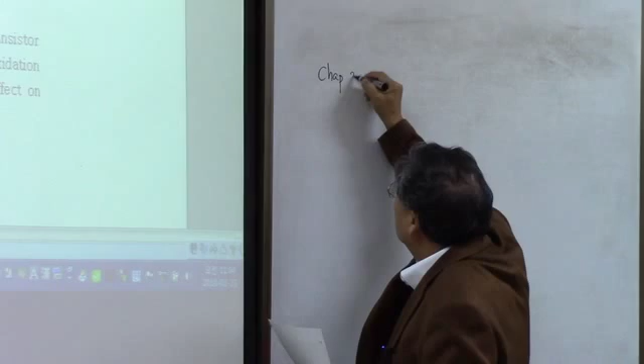Oxidation, which is chapter 3. Okay.

Well, oxidation, we are particularly going to discuss about the silicon oxide, which is this thermal oxide, we call it thermal oxide. And this happens at elevated temperature, it has to be more than 900 degrees centigrade, and typically is done at 1000 degrees centigrade and 1100 degrees centigrade in between.

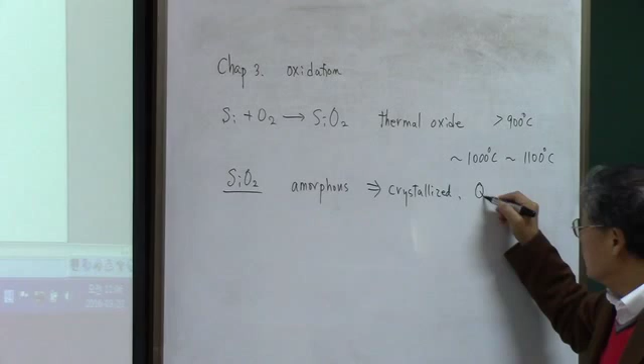Okay, so in the note, it has a summary of the characteristics of silicon oxide. This silicon oxide is amazing material. This is basically amorphous, and we can crystallize this thing, and if it is crystallized, it is going to be called quartz. Expensive material.

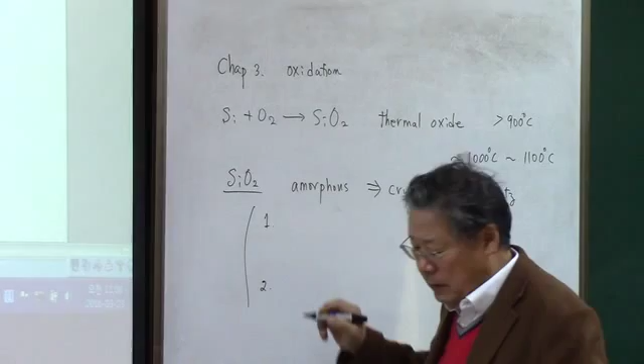Well, there are many beautiful characteristics of silicon oxide, and that has been summarized in the note. But I want to emphasize two things among those characteristics. One is the excellent dielectric properties it has. And the other thing is the volume change after oxidation.

Well, firstly, about the excellent dielectric properties, let me give you the example of three different kinds of oxide. The first, the common thing is the iron oxide, Fe2O3. We can have oxidation continuously so that we can have a thick oxide, okay? But it is not dense enough. We just scrub off. We can scrub off the oxide, iron oxide, okay?

So it is not dense, but it has a continuous oxidation. It's possible. Continuous oxidation is possible.

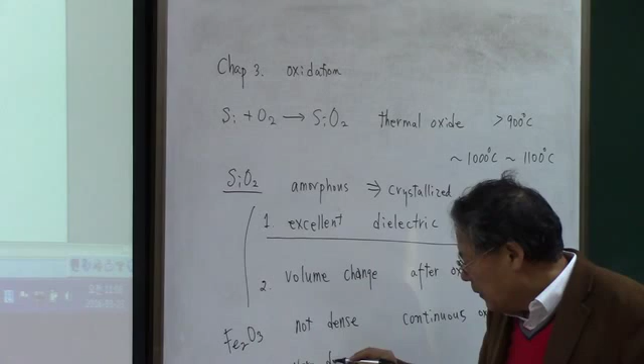Another form is the aluminum oxide. It is very dense, and it has a passive layer, so that only 50 angstrom of oxide is formed, and then no more oxidation can happen. Oxidation cannot be continued after the 50 angstrom of aluminum oxide.

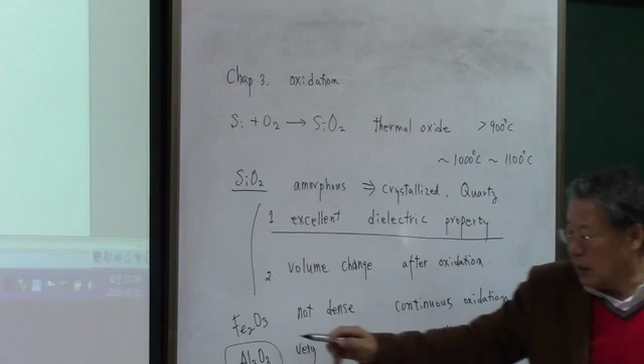So that's why this aluminum oxide can be used as a can for beverages. Okay, it's safe. You cannot use iron steel for the beverage cans. If you do that, then you are going to have iron oxide continuously, and that iron oxide can be scrubbed off from the surface after the oxidation.

But silicon oxide is in between these things, so that it can be used in VLSI, semiconductor fabrication. It is not very dense, but dense enough to have good dielectric properties. And then we can grow 1 or 2 microns of oxide.

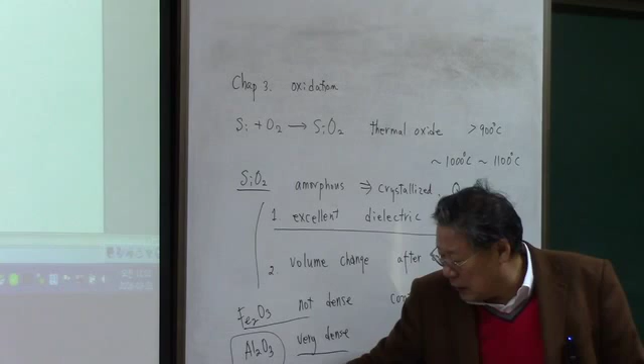The oxidation rate is not that fast, but we can grow the silicon oxide on top of the silicon surface up to 1 to 2 microns, and that is thick enough to be used for VLSI. So this is the gift from God, we should say.

Okay. If this silicon oxide is to have the properties of iron oxide, then it cannot be used for semiconductor fabrication, transistor fabrication, whatever. And if it has alumina characteristics, also we cannot use this silicon oxide for transistor fabrication. So it's very fortunate to have silicon oxide with those properties, and more importantly, it is not that difficult to form a silicon oxide on top of the silicon.

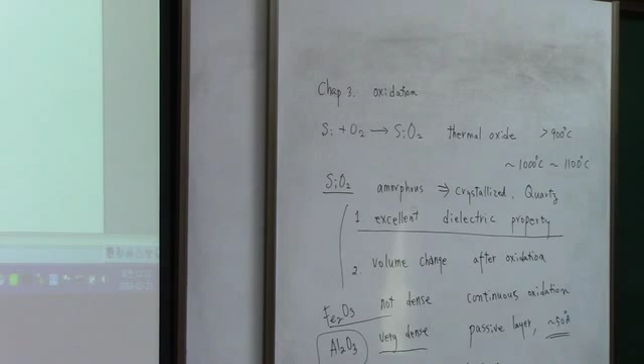All we have to do is just to put the silicon in the furnace in air at elevated temperature like 1000 degrees centigrade or 1100 degrees centigrade. That's all that we have to do.

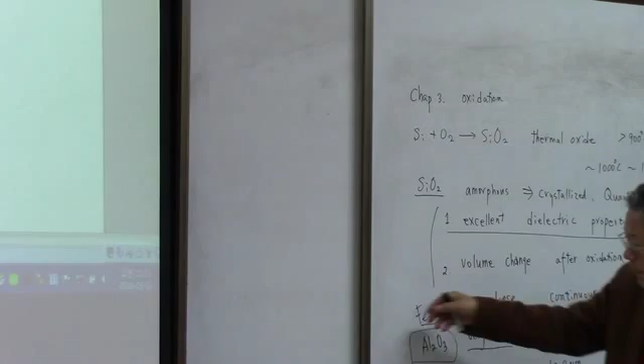Okay, and the second characteristic of silicon oxide, which is volume change after oxidation, that is the beautiful thing that turned out to be very important in the fabrication of VLSI. Now, when you say the volume change,

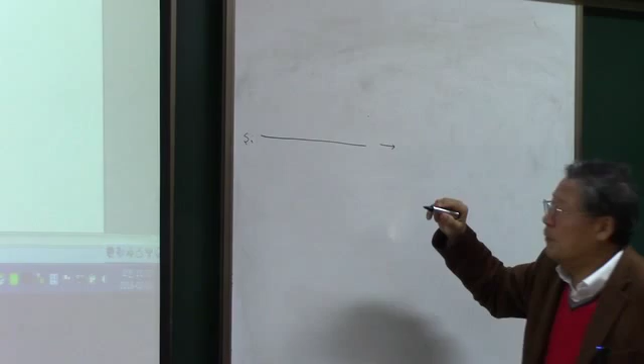it means that if you have a silicon surface like this, and after the oxidation, you're going to form some oxide, and some goes down to the silicon surface, and some goes out to the silicon surface, so that this whole thing is the silicon oxide, and the distance from D1 is equal to D2, so that the volume is doubled, I should say. Okay? That is the volume change.

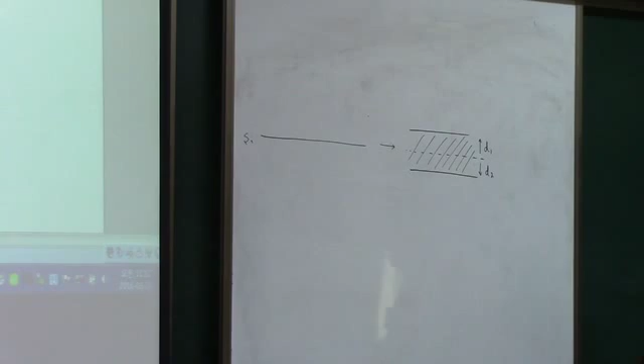And let me introduce local oxidation of silicon. We call this LOCOS process. It's a very famous and very essential process for VLSI.

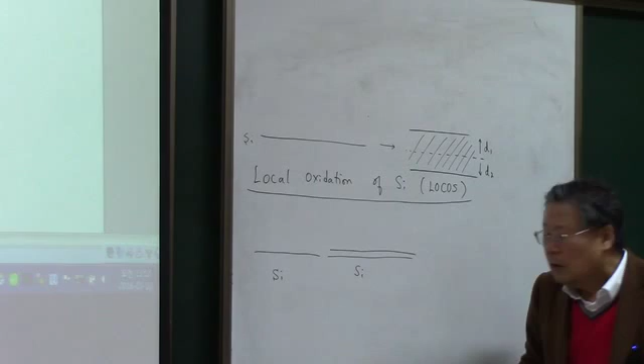What we are doing here is that we have a silicon surface here, and then first we put the oxide. We grow thermal oxide, we call that base oxide, and this base oxide thickness is about 300 angstrom or so, not that thick. Okay, and then we deposit the nitride on top of it, and this silicon nitride thickness is about 1000 angstrom.

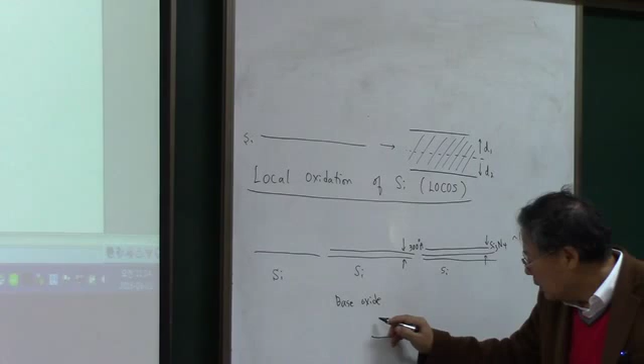Okay, and then we do the lithography to get a pattern, and etch the silicon nitride and the silicon oxide, so that we are going to have an opening something like this, and then do the oxidation. This silicon nitride is going to block the reaction of the silicon with the oxygen, so that we end up with some shape, something like this. Okay.

This is one end, and at the other end has the same shape. Because of the volume change, we have some lifting of this silicon nitride. This is the silicon oxide, the silicon. So when this area is oxidized, it's going to change the volume, and at these edges it's going to be lifted due to the volume change, so that we end up with this thing.

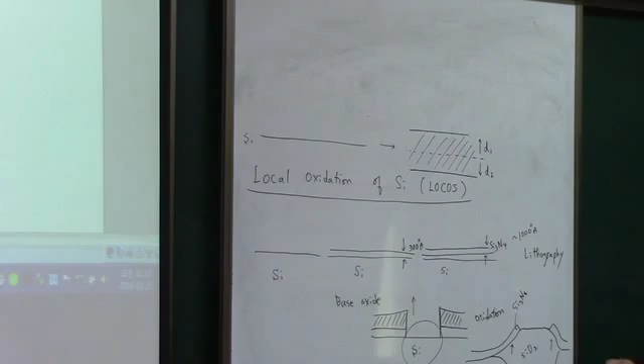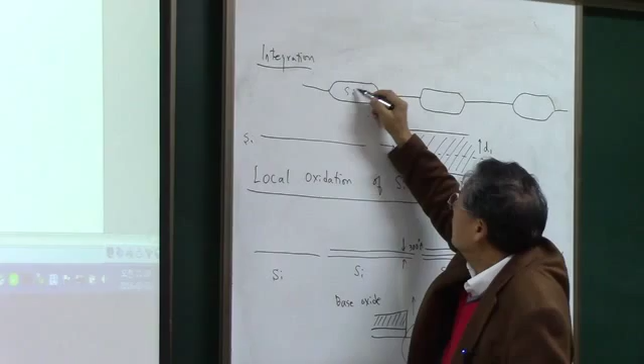Why do you want to have this? Because integration means we are going to fabricate independent transistors and collect them in a certain area, electrically independent. So what we are doing here is physically separating the transistors in the VLSI by this oxide, by formation of this oxide in between.

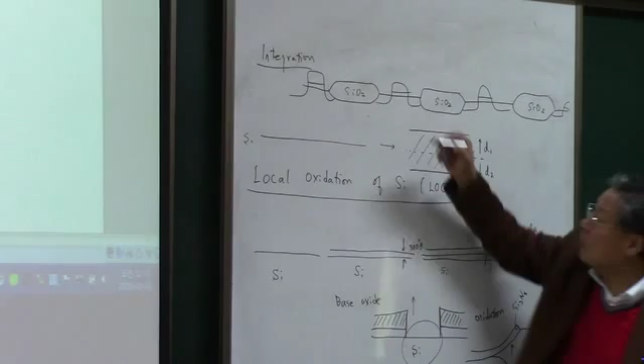So here, that is one transistor, and each transistor is going to be separated by what we call field oxide. This is going to be called the field oxide. That is the cross section of the integrated circuits.

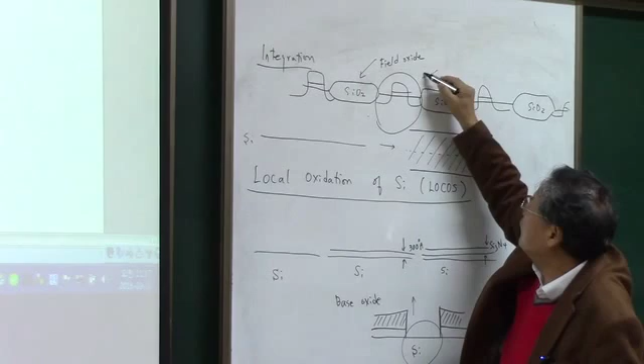Now, when we integrate these transistors, we are going to separate them electrically by formation of silicon oxide in between. So in the real process, in the silicon surface, you form the silicon oxide first, the field oxide first. And then you make transistors in the area between the field oxide, and this area is going to be called the active area, where the silicon transistor is going to be implemented.

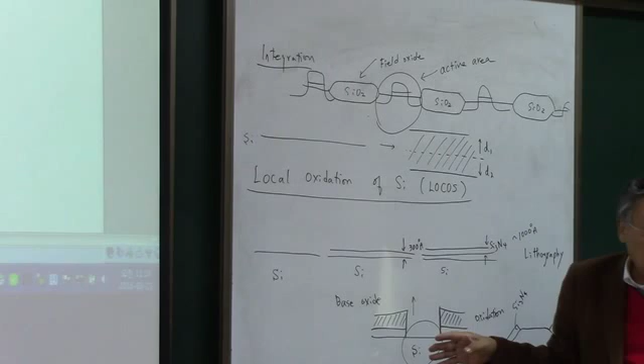So at the very beginning of a VLSI process, we have to form the field oxide to define the active area. And for the formation of field oxide, we take advantage of the volume change by oxidation, and then we end up with this thing.

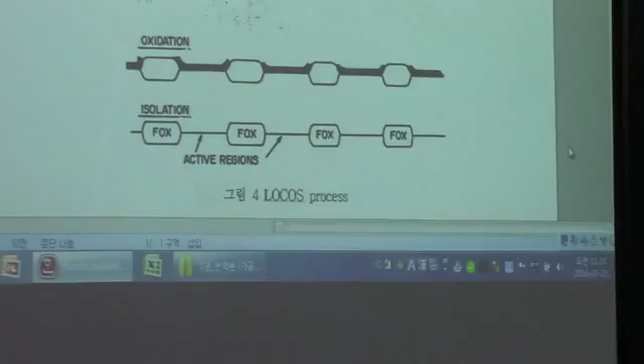Bird's beak - you know what a beak is? A bird's mouth. The shape just looks like a bird's beak, so we call this bird's beak. And there are two other different ways to make a field oxide.

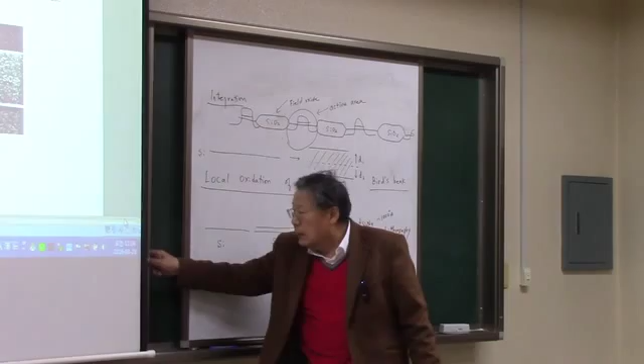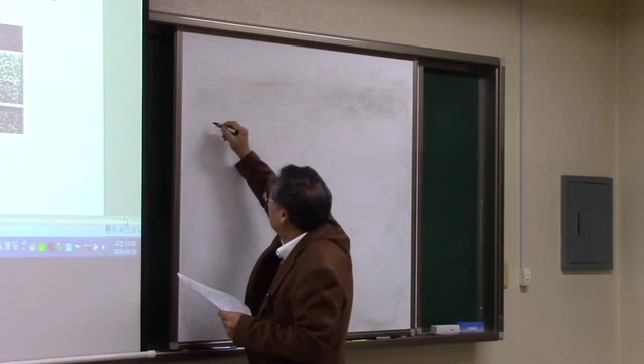Another thing is, oxide - we call this oxide isolation. And we have three methods. Number one is fully recessed. Number two is non-recessed. Number three is semi-recessed.

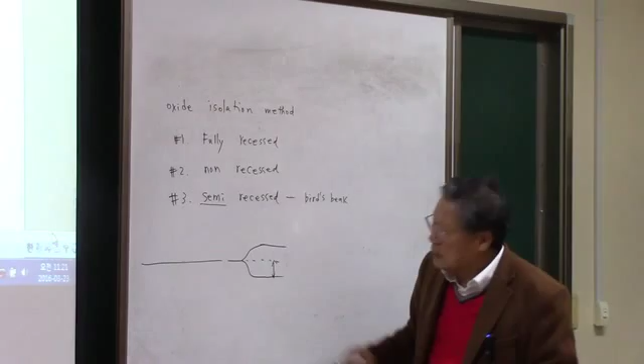So the bird's beak happens in this semi-recessed process. Semi-recessed means that on the silicon surface, field oxide is going to be formed half on top and half on the bottom. So this part is just half recessed, depressed. That's why it is called semi-recessed.

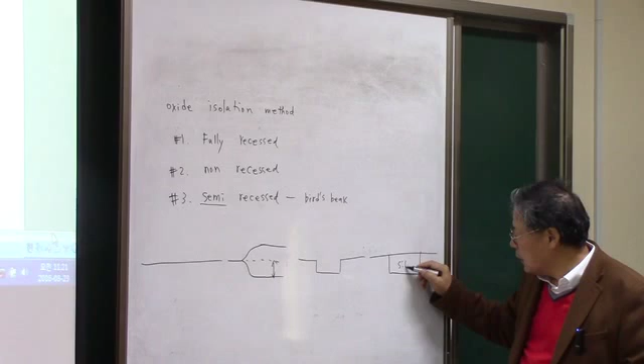Fully recessed means that on the silicon surface, you etch a certain part of the silicon surface before oxidation, just half of the oxide thickness. Then you do the oxidation, and you end up with silicon oxide, so that the surface is planarized. This is the fully recessed oxide. But in the actual process, it never happens exactly like this.

As we have a bird's beak here, we are going to have a bird's head instead of a bird's beak. Because you have nitride here, and the nitride is going to be lifted at this edge. And the shape has been shown in the note.

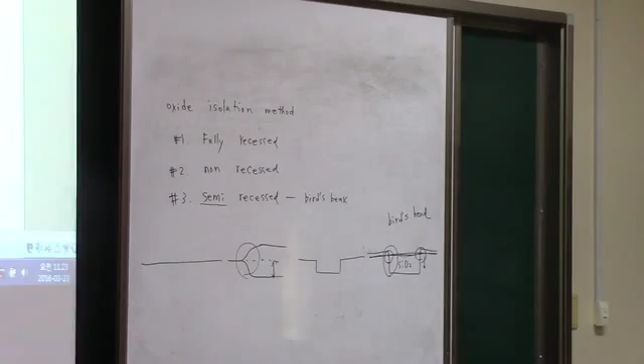This is the fully recessed LOCOS, so that the surface here is almost the same. Here we have nitride, and the nitride is going to be lifted up here like this, and then the oxide is fully recessed, so that we have this shape. And we call this a bird's head, because it just looks like one. That's the fully recessed.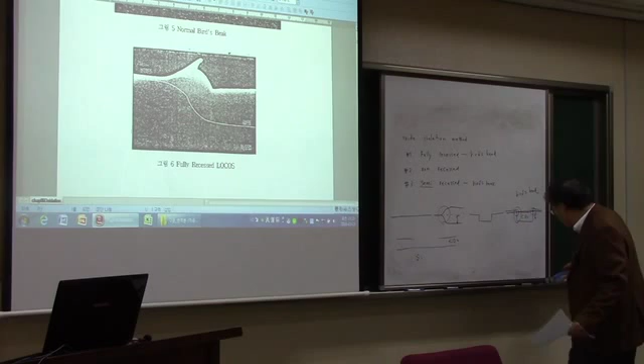And non-recessed is just nothing but we have silicon here, and we deposit the silicon oxide or form this thermal silicon oxide, and then some part is etched with lithography, so that we have just like this.

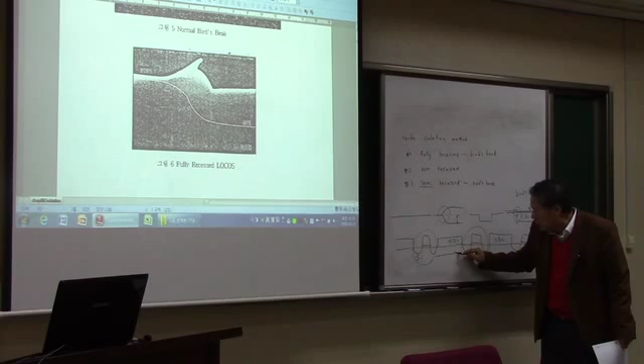What is the drawback of this process? The drawback is that obviously, if we have a silicon oxide like this, and then you form a gate and source in between this non-recessed silicon oxide, this transistor and this transistor can communicate - they are not electrically isolated, because there is no silicon oxide underneath this oxide. So it is not really blocking the communication between transistors in a non-recessed process. But more importantly, it has a drawback we call the residue.

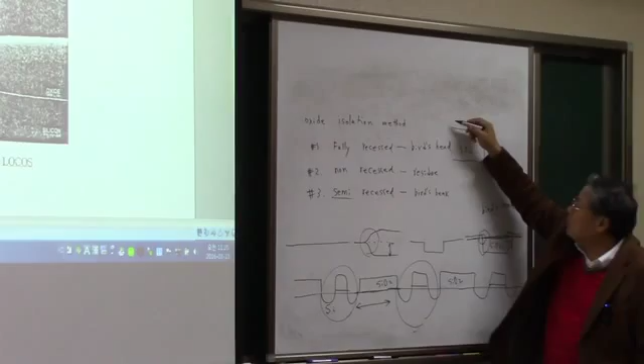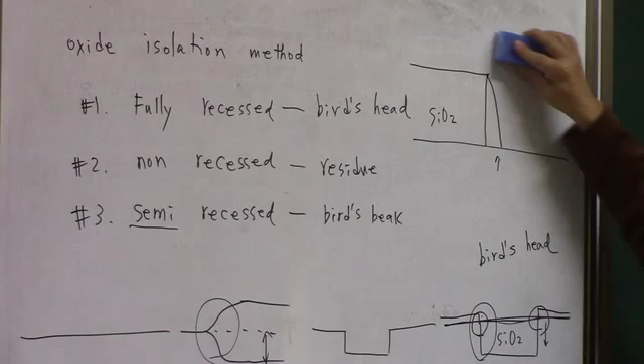Now, if we have just a steep cliff like this, and then on the next process, if you deposit some film on top of this and then do the etch, this part is going to be etched in this fashion, thicker than the other areas, so that after etching, you end up with this kind of shape. You have some residues along the side wall of the silicon oxide, in the right angle.

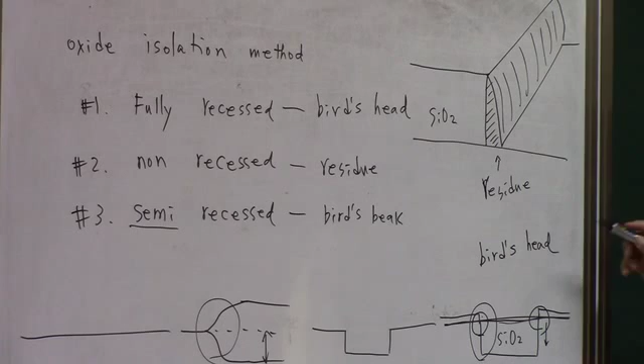So in the real transistor, you are going to have residues along the vertical direction of this whiteboard, right? And if this is a metal film, it's going to short every transistor along these directions. So we do not want this residue.

So why we call this semi-recessed process, the silicon oxide volume change is beautiful for the VLSI integration, is that when you do this, okay, we have a bird's beak, but we have a smooth curve here because of the volume change. That smooth curve is very important, preventing the residues in post-processes.

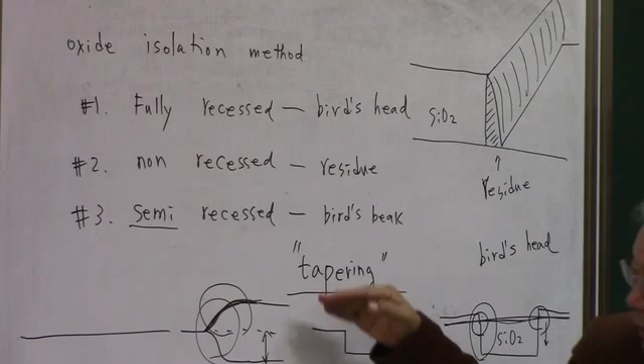If you want to do that intentionally, it's not easy to have this smooth curve. That is called tapering. We sometimes artificially make that right angle smooth. We have many means to do that, and we call that process tapering. It's complicated, but in case of silicon oxide in the semiconductor process, naturally the smooth curve can be formed after the oxidation, so it is so beautiful.

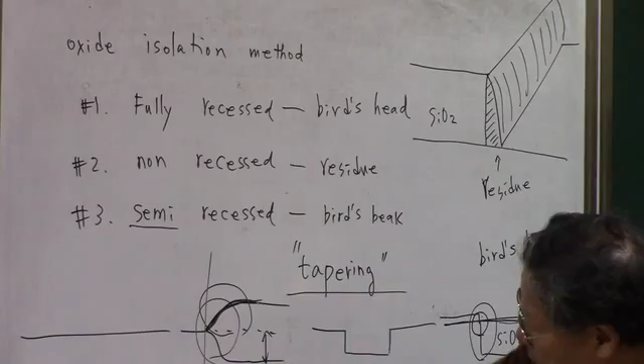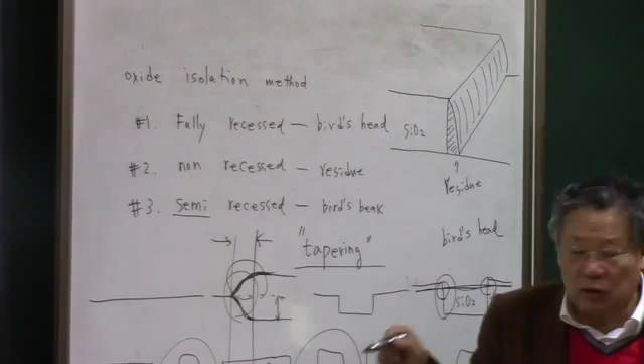Now, the drawback of this semi-recessed process is this bird's beak, literally from here to here, where we have a slope - that area is going to be called the bird's beak. The silicon oxide in this region is too thin for field oxide and too thick for gate oxide.

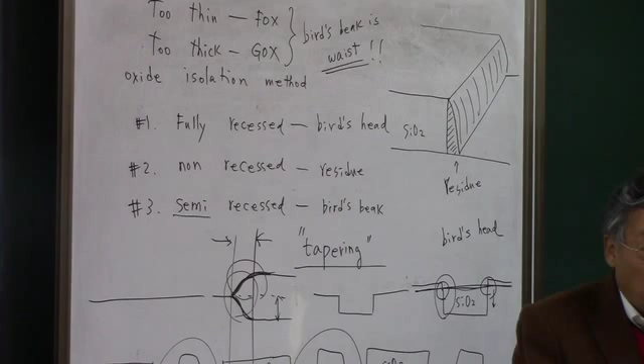So it's just a waste. Bird's beak is waste. When you do the integration, every piece of silicon surface is very precious, very important - that is the place where the tiny transistors are going to be built. But this bird's beak area is just a waste because it's no good for the field oxide and no good for the gate oxide. We can do nothing at this bird's beak area. So many research efforts have focused on reduction of this bird's beak length.

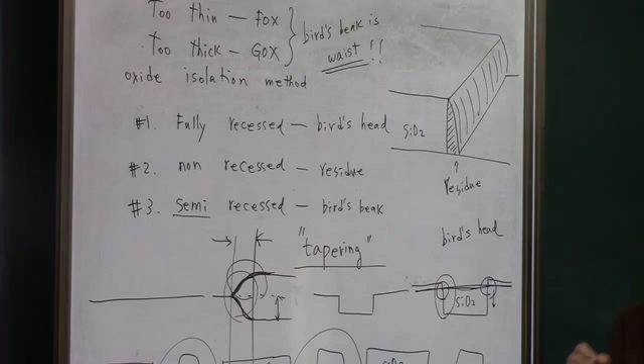How can we decrease the bird's beak length? Well, that is related to the base oxide thickness and the nitride thickness. If you have a very thin base oxide, less than 300 angstrom for example, then the bird's beak - the side diffusion of the oxygen underneath this mask - is going to be prohibited. Less diffusion can occur if this base oxide is very thin, so the bird's beak length is going to be reduced.

Or if you increase the thickness of the silicon nitride, since silicon nitride is a dense material, it can hold back the penetration of oxygen underneath the silicon nitride mask, so we can reduce the bird's beak by increasing the silicon nitride or decreasing the base oxide. But if we try to decrease the bird's beak, then because of the stress due to the volume change, dislocations and crystallographic defects...

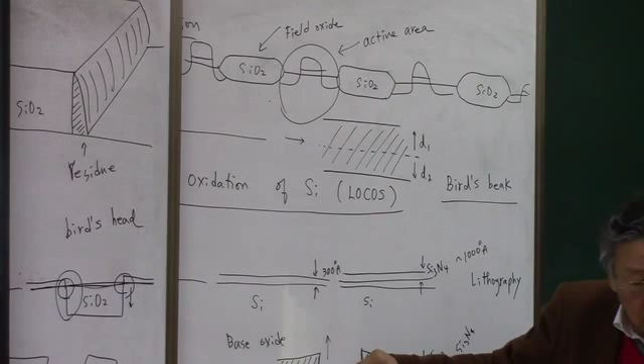Dislocations can be formed at this bird's beak area, and the crystallographic defect is going to be propagated from here. So we cannot actually decrease the base oxide too small, too thin, or increase the silicon nitride too thick, to decrease the bird's beak. So in some part we have to live with a certain length of bird's beak.

These days, the bird's beak length is typically 0.7 microns at each side. So you build the transistor here, and at each side, 0.7 micron is going to be wasted. After that, you have a field oxide, which really works to block the communication between the transistors.

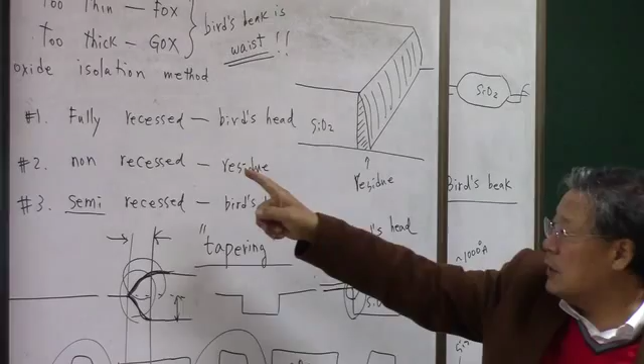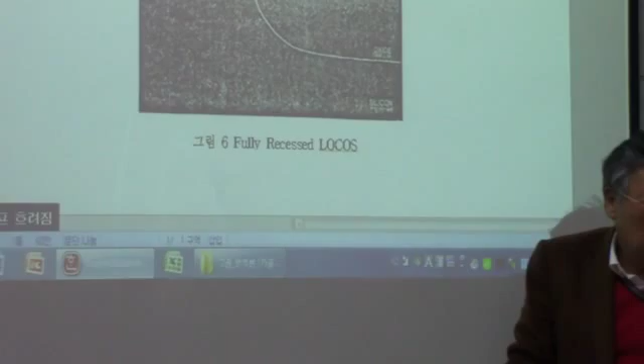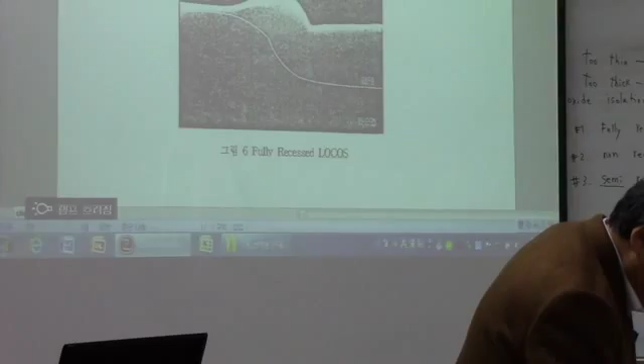That's what that is. Of course, in the fully recessed process, we also have a bird's head, and we have a planarized surface, a reasonably planarized surface. But this bird's head can also create defects along this direction, and the bird's head area is just a waste, just like the bird's beak. The process is also a bit more complicated than the normal semi-recessed process. So, as far as I know, nobody is doing the fully recessed process in industry.

Now let's take a moment to see the equipment that we are going to use for the oxidation process. All the properties of insulated silicon oxide and silicon nitride and things has been tabulated in this table, so you can use this as a reference.

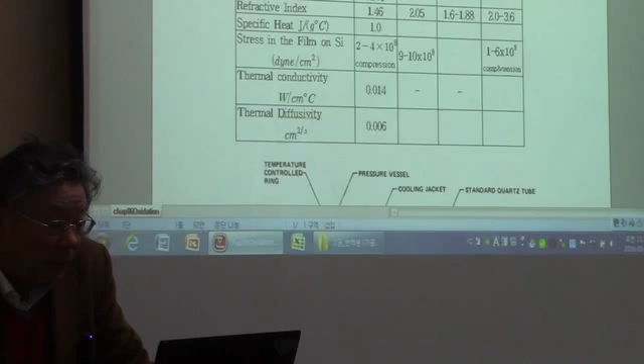This is the typical example of an oxidation furnace. It doesn't have much - it just has a loading system and then an open furnace.

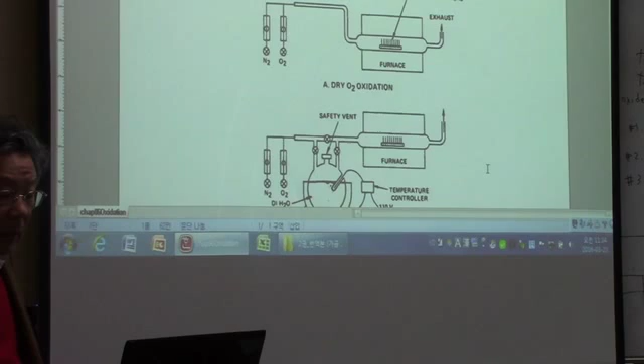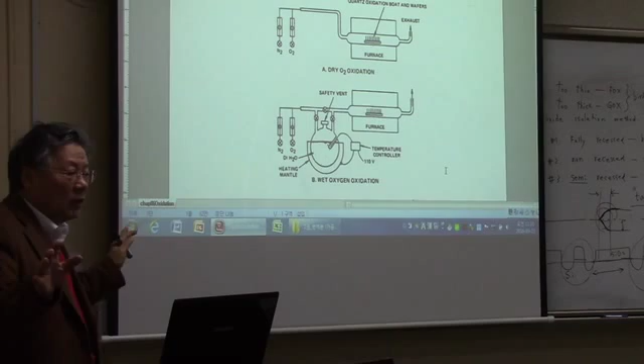There are three different kinds of oxidation. One is dry oxidation, which is on top of this figure. Dry oxidation is nothing but you put oxygen on the silicon wafer at elevated temperature so that silicon plus O2 makes silicon oxide - the chemical reaction happens on the surface. That's the simplest one, and here N2 is the carrier gas. You flow some oxygen, and you have to carry this oxygen into the furnace with this N2 gas.

This is the wet oxidation equipment. Here what you do is not only use oxygen, but there's also water, H2O, which is flowed into the furnace. We'll discuss this later, but wet oxidation has a higher growth rate of oxide than dry oxidation - very fast, a very high oxidation rate compared to dry oxidation. So this is a very important piece of equipment.

And lastly, we have pyrogenic oxidation. In this pyrogenic process, we use oxygen gas and hydrogen gas separately, and with the carrier gas you flow those two gases into the furnace so that at the silicon surface, hydrogen and oxygen react to form water, and it ends up like wet oxidation anyway. But this pyrogenic oxidation has to be distinguished from wet oxidation because the oxidation rate and oxide quality is different.

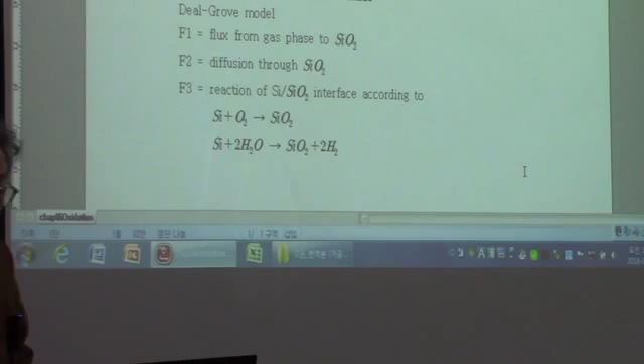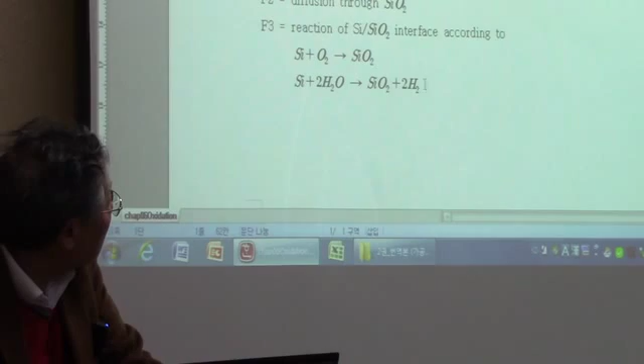So after this equipment review, we have to go for the growth kinetics of silicon oxide. For the growth kinetics of silicon oxide, we are going to use the Deal and Grove model. This is a very famous model, developed in the 1960s, I guess.

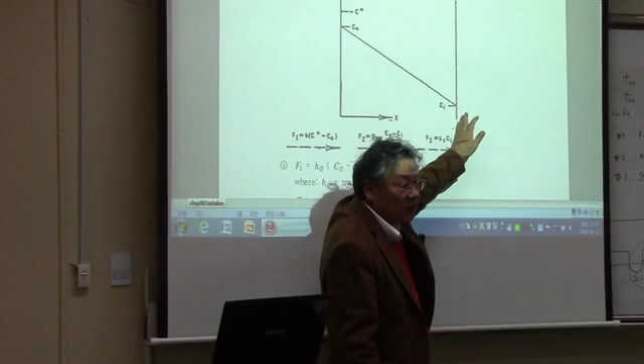Basically what it does is when you look at the silicon oxidation process, you can distinguish three regions: the silicon surface, and in the middle of oxidation you have some silicon oxide on top, and at the surface of the silicon oxide you have a gas ambient which contains the oxidant. So we have these three regions, and what we'll talk about is three fluxes. One is from the air coming to the silicon oxide across these boundaries, the other flux is the oxidant flux moving from this surface to the surface of the silicon, and then at the silicon surface, the oxidant which arrives has to be consumed.

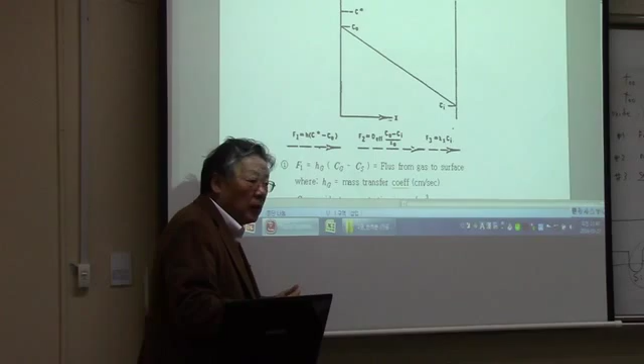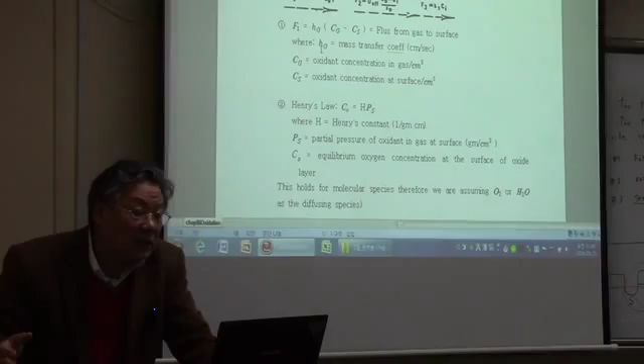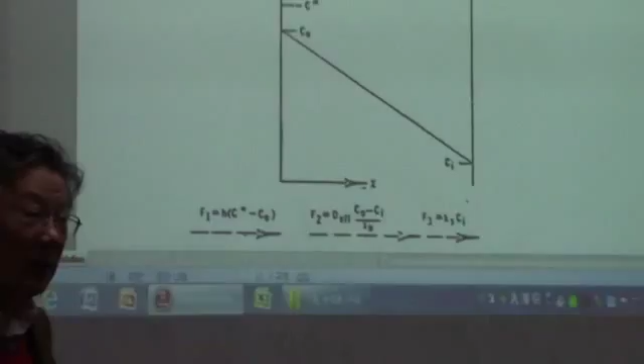For each flux, the first F1 is related to the mass transfer coefficient. You set the mass transfer coefficient, you set there is a concentration gradient - that concentration Cg is the oxidant concentration in the gas, and Cs is the oxidant concentration at the surface. So we are talking about this dotted line here. This concentration gradient is related to the flux by this coefficient. Whenever you come to the word coefficient, it means we don't know anything about it - we just put some constant, because the concentration gradient should be related to the flux somehow. So we empirically set this equation, and we call this h a coefficient, mass transfer coefficient, things like that.

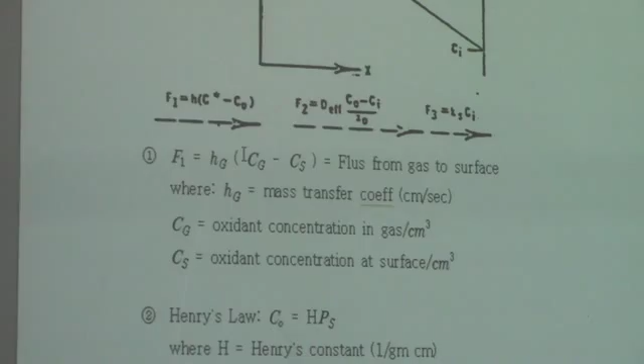Oxidant concentration in the gas, we know that, but oxidant concentration at the surface can be related to the pressure, partial pressure of oxygen, partial pressure of oxidant, precisely speaking, with Henry's law. Henry's constant is going to relate to that.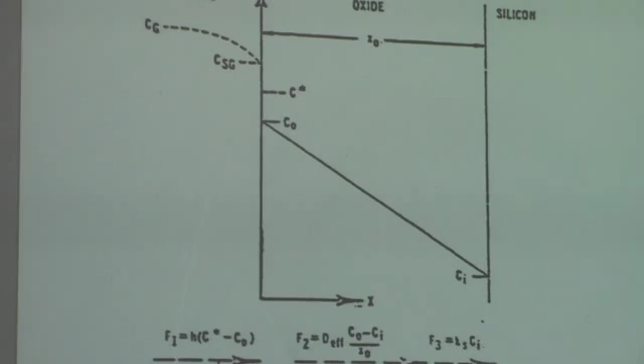And we set the C star, and C star is here. C star and C naught have been depicted in this diagram. C star is the equilibrium concentration of oxidant in oxide, which would be in equilibrium with the partial pressure of oxidant. So this C star equilibrium concentration is related to the Henry's constant, and using the ideal gas law, we can relate F1 with Henry's law and C star, things like this.

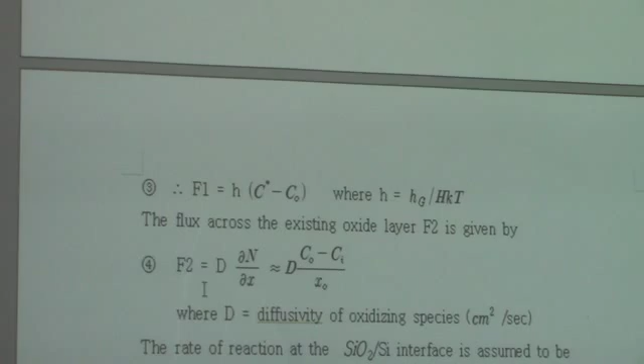Okay, this is the final thing that we have to use. F2 is nothing but Fick's first law, concentration gradient and the diffusion coefficient. And concentration gradient - this X naught is the thickness of the oxide, and C naught and Ci is the concentration gradient inside the oxide. Okay, that's simple. And F3 is more simple.

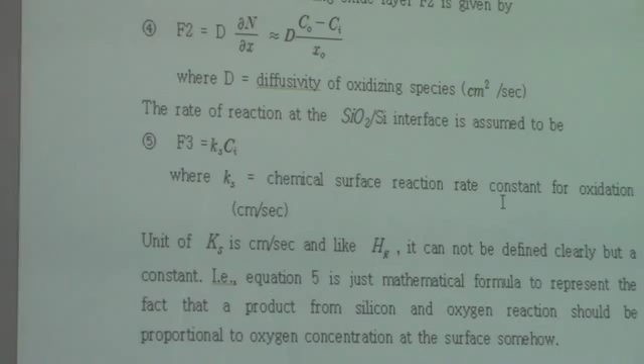We use the chemical surface reaction constant, and that is related to the surface concentration Ci. This reaction constant is a thermally activated process, which means we can represent this Ks reaction constant in terms of the Arrhenius plot, the Boltzmann plot. We are going to get to that in a minute.

In a steady state, F1 should be equal to F2 and F3. Otherwise, the oxidant has to be accumulated or depleted in some regions. So in a steady state, the fluxes should be the same, and the slowest flux will control the other fluxes as well.

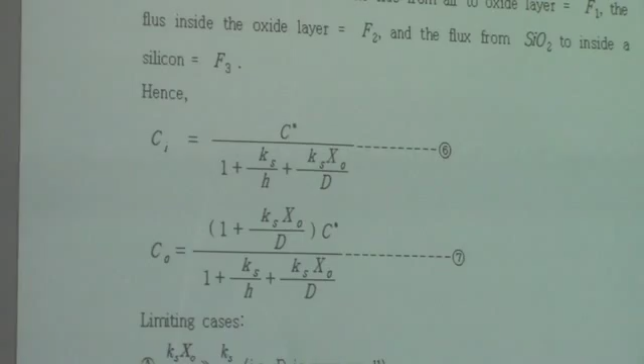And you equate all those things, and then you end up with some equations here, and it has limiting cases, but the limiting cases are related to the diffusion coefficient of the oxidant inside the silicon oxide.

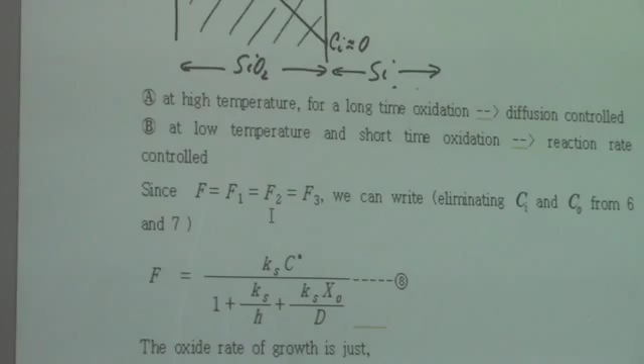By putting F1 equal to F2 equal to F3 in a steady state, all these fluxes can be represented with this equation. And the oxidation rate is nothing but the thickness of oxide with respect to time. That is the oxidation rate, and that is the flux F divided by the number of oxidant molecules per unit volume of oxide.

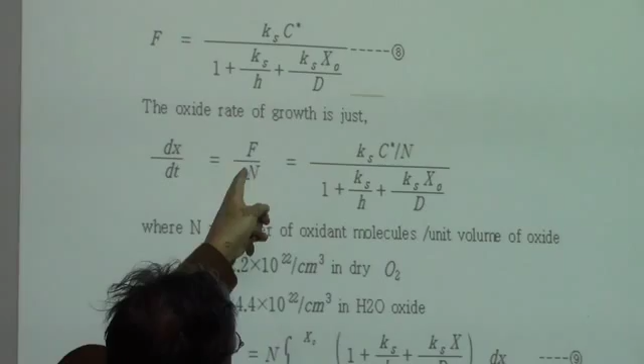That is the oxidation rate. The flux is the number of oxidant molecules passing a reference plane per second. So the oxidation rate is F divided by N, and we know F can be represented as equation 8. Then we end up with this. Here, the number of oxidant molecules is different in dry oxidation and wet oxidation.

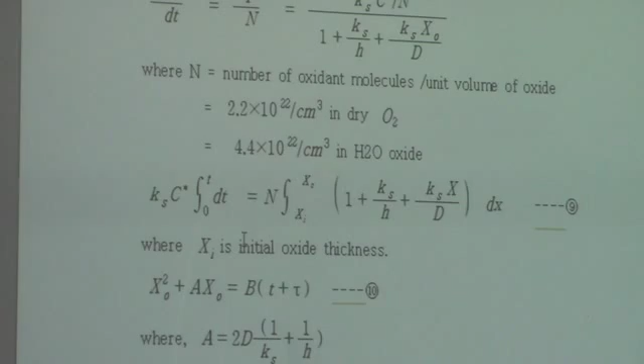You see, wet oxidation has more dense silicon oxide than dry oxidation, dry oxide. So you are going to have this second order equation with two constants from the above equations, and one constant is A here in this equation, and another constant is B, but instead of A, B over A is a special constant because it is a linear rate constant.

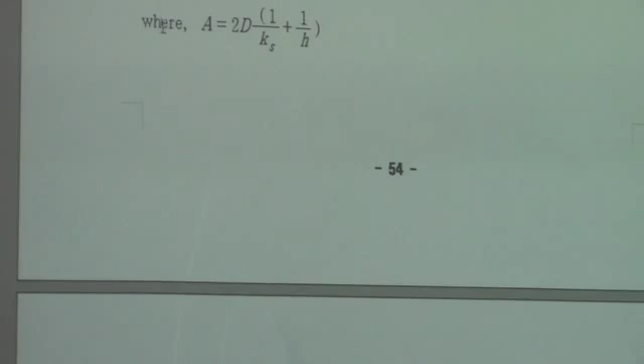We call that the linear rate constant, and that is more often used in experiments. So, the conclusion of this Deal-Grove model is that we end up with this equation with these constants, and this equation has two limiting cases.

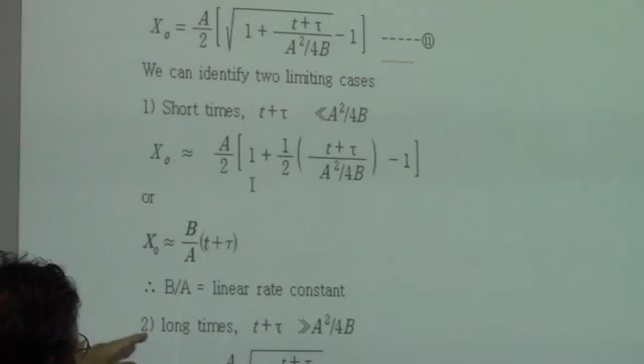We can analyze this Deal-Grove model in two limiting cases, where short time means at the beginning of the oxidation, and long time means at the end of oxidation, after the oxidation process has progressed.

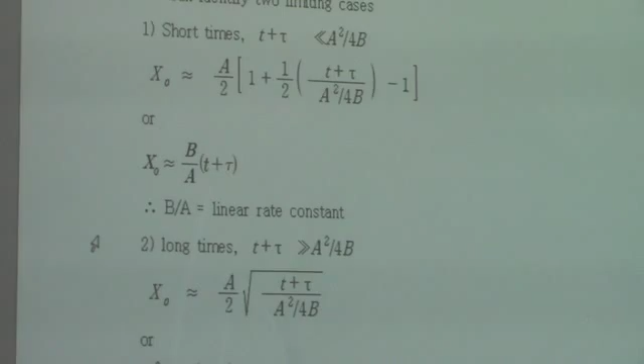So at the beginning, the oxide thickness is linearly related to the time. This equation says that at the beginning of oxidation, if this is the oxide thickness and this is the time, at the beginning we are going to have a straight line here, and the slope is B over A.

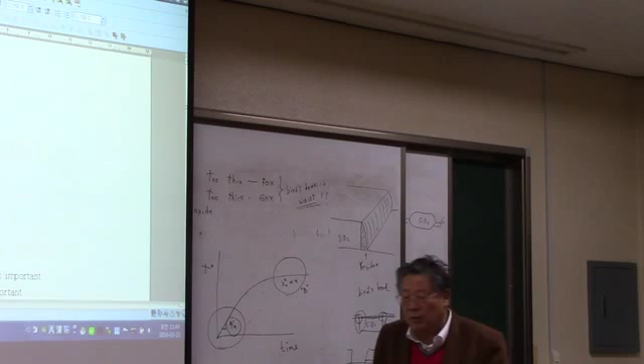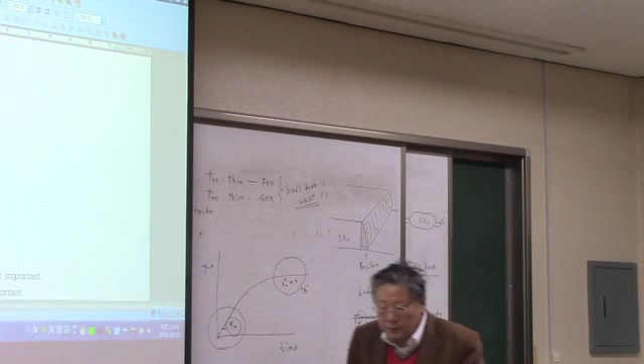So next week on Monday, we're going to discuss B over A, the linear rate constant, and B, the parabolic rate constant, in more detail. And then we analyze some of the experimental results that we can obtain, which actually support the Deal-Grove model.